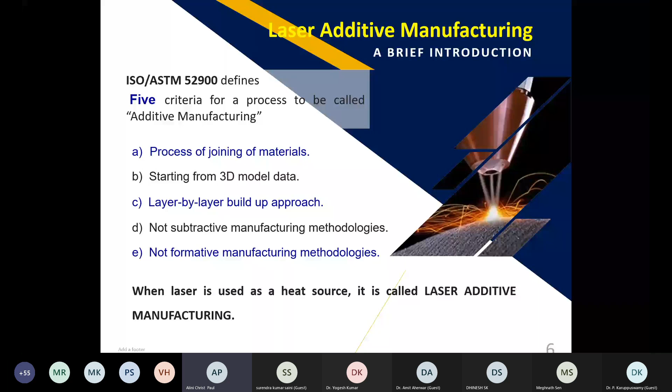I will say additive manufacturing is nature's way of growth. You take a seed, and how does it grow into a plant? It collects all the things from the surroundings and grows. Similarly, an infant becoming an adult is also taking, eating, and doing so many things, and finally becomes an adult. This is a sort of additive manufacturing.

We, as human beings, try to work on and learn this technique from the beginning, and try to make houses. This is a very fantastic example you see here. We use some basic blocks and make the house.

We were not addressing this because we did not have the capability to address it. This was more natural. Therefore, we were going for other methods which were logically simple and easier for human beings to work on, focusing on subtractive and formative manufacturing processes.

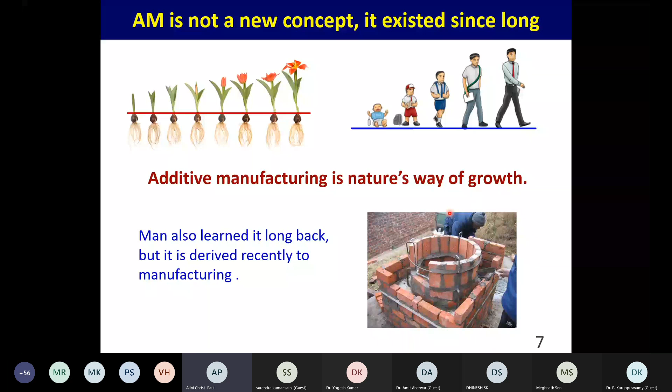Now, if you compare these three technologies, let me highlight some points. In additive manufacturing, surface finish and dimensional accuracy are low to medium, while these things are pretty good in subtractive and formative manufacturing.

Similarly, if you talk of size of components, a bigger component can be machined in subtractive, but in additive we have a limitation of machine size, so there are issues.

But now what makes it different? The difference is that it uses a shapeless material and makes it into a different form. The buy-to-fly ratio, meaning the material you buy versus the material that ends up in the part, is very close to 1, which is very good. And if you talk of geometry, it's made altogether different for manufacturing, and it is changing the whole approach.

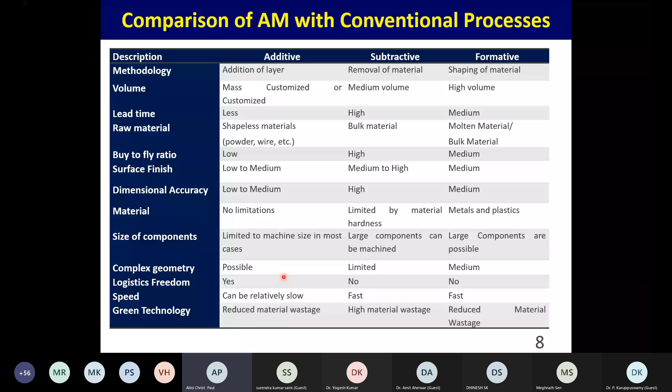So with this small discussion, let's see how it behaves in terms of cost. In additive manufacturing, cost per part doesn't vary a lot. There is a small slope due to things like initial design charges or procurement charges, which may not affect the cost much, but there is still a small slope.

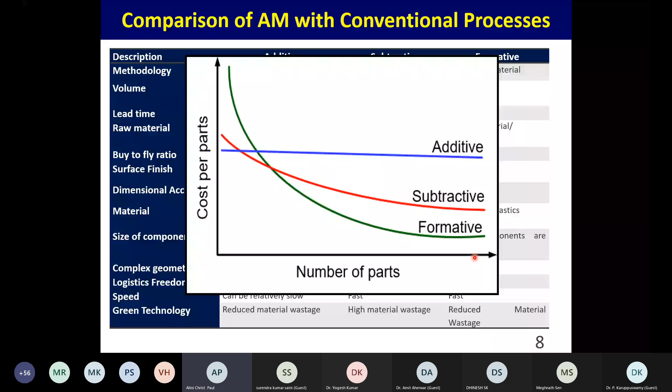But in subtractive and formative manufacturing, as the number of parts increases, the price goes down drastically. So this is the basic difference in terms of price.

Now let me introduce, when we talk of such a big technology, why do we need this, and how should things be done? Let me take an example from a very commercial market. We all love cars as mechanical engineers. Yes, we all know cars. Now let's take the example of the car market.

Today we have cutthroat competition. If you compare some 20 or 25 years back, we had only two companies in India selling cars, Fiat and Ambassador. These companies were targeting a particular segment, and there was no competition. They were selling the way they wanted, so there was not a lot of change.

Now, in pure engineering terms, the cost of a car has two components: one is the cost of manufacturing the product, and second is the cost associated with the development of the product. I'm not talking of profit, economics or other stuff, just the straight engineering aspects. So the car cost has two major parts: manufacturing cost, which includes material and everything, and development cost. Now, what is happening in these years? Though the market has grown up...

...the number of competitors in the market has also increased. Today we have Suzuki, Fiat, Honda, Hyundai, MG, so many players, each coming with more models targeting different segments. So what is happening eventually? Though the size of the market has increased, the effective volume of cars sold per particular model is reduced. Since it is reduced, the development cost is likely to go up.

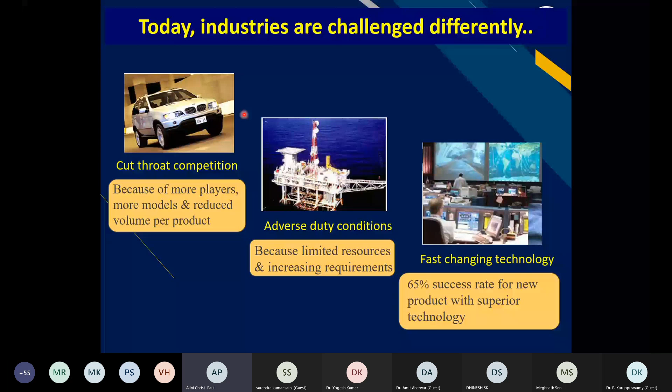Let's understand how things can be achieved. Keep these challenges in mind as we address them in the second part, as we go ahead trying to understand how things are. So let's focus first on the overall methodology of laser additive manufacturing.

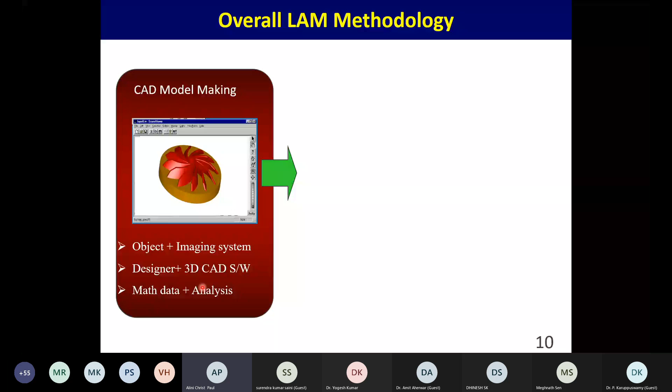In laser additive manufacturing, we start with a model, which can come from an object and imaging system, or be the output of a designer using 3D CAD software, or the output of mathematical data analysis. Once this is done, we slice the model, then do some job manipulation, then layer-by-layer material deposition, and finally the product is converted into the finished part. This is the overall methodology of laser additive manufacturing.

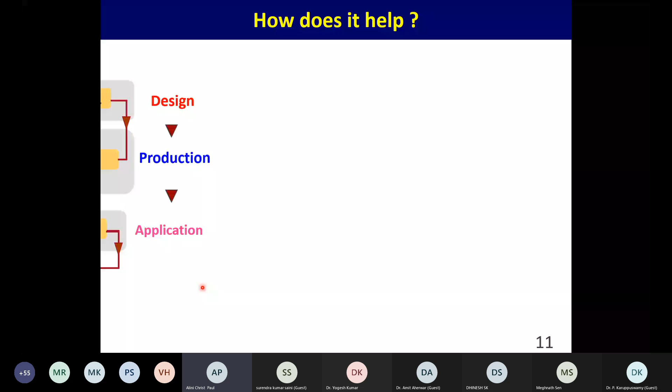Now, we are working on this methodology because there are challenges in the market we have to address. How can we use laser additive manufacturing to change the economics? How can we take advantage so that we become attractive in this space?

I'm presenting you a conventional manufacturing cycle. Let's see how it works: we go for synthesis of the design, do the analysis, prepare documentation and drawings, then plan how to proceed. Once the design is finalized, we procure raw material, procure tools, do programming and manufacturing, then quality control, and finally packing and usage. This is a typical cycle of how conventional manufacturing works across the levels of design, production and application.

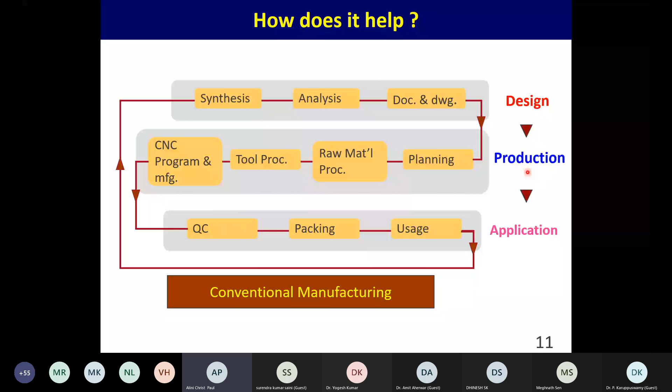Now, if you take additive manufacturing, laser additive manufacturing, you see there are so many things which are redundant and removed from the development cycle.

See what is happening? We are working with a 3D model, so we need not go for separate preparation of drawing and documentation. The model itself has all the information. We need not worry so much.

Second part is we are using laser additive manufacturing. We, as a machine, are planning the whole stuff into it, so we need not worry a lot about the planning aspect. In conventional process, we think whether this job has to go for lathe, or milling machine, or should we send it to the fabrication shop for welding. All this planning, if the design is ready, you can just proceed ahead.

But in case of conventional manufacturing, unless the design is freeze, you cannot go for procurement of raw material. Obviously the reason is, if you think the size of the final component comes as a design of 200 by 200 by 200 millimeters, and because of some reason 1 millimeter goes up, you are gone.

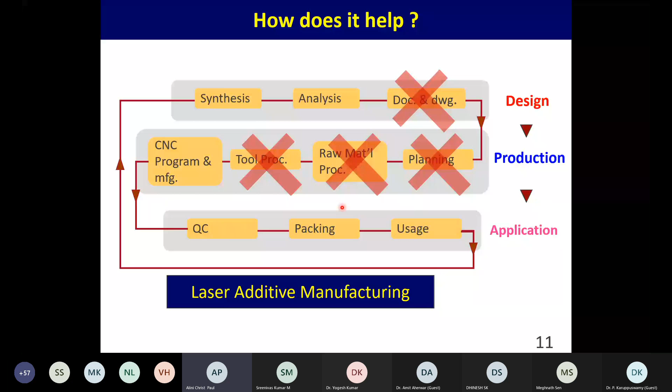So that is the thing which is changing the whole scenario. So what I'm planning is, now let's try to summarize whatever advantages I talked about and discuss these points. What are these advantages? One advantage we talk of when we talk of laser additive manufacturing, the very basic concept of additive manufacturing, we always call complexity for free.

See what is happening, if you take a very complex shape and slice it into 2D, every 2D slice becomes a very simple structure. For example, if you make a cone and slice it, it is simple - circles one over another with reducing diameter. So that is very simple. If you extrapolate this to a very complex product and slice it, you will find the complexity is for free.

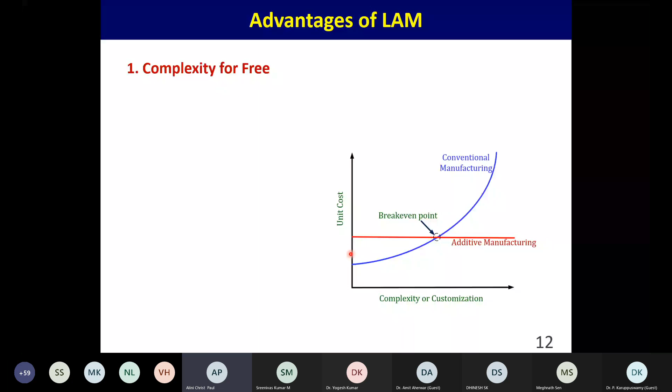The second aspect is the simplification of part fixturing. If you talk about conventional machining or manufacturing, you need very tight part fixturing because there are a lot of cutting forces and so many things coming on it, so you have to have something different. But in case of laser additive manufacturing, we are using non-contact tools, so things are simple and better.

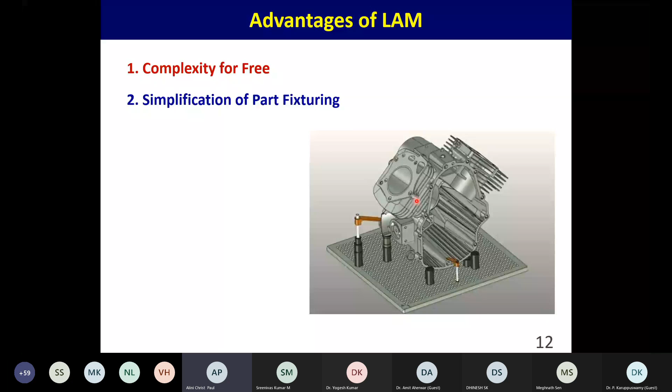Mass customization is possible. If you see in the last 1 century or maybe 1.5 century, the whole engineering started from customized products. Earlier we had fitters who were fitting the job as per requirement, and that's how the first or second cars were made. Slowly they started moving toward standardization of the product. They came with different standards, metric standards and ISO standards for components, and even different nuts and screws were tried out and standardized. So what happened, from customized we moved to a mass production level by standardization.

Now we are going one step ahead. We are taking 'mass' from mass production and 'customization' from customized product. So we are matching these two, and now we are going for mass customization, because the customer wants everything differently for himself, and it's possible to accommodate these aspects in laser additive manufacturing.

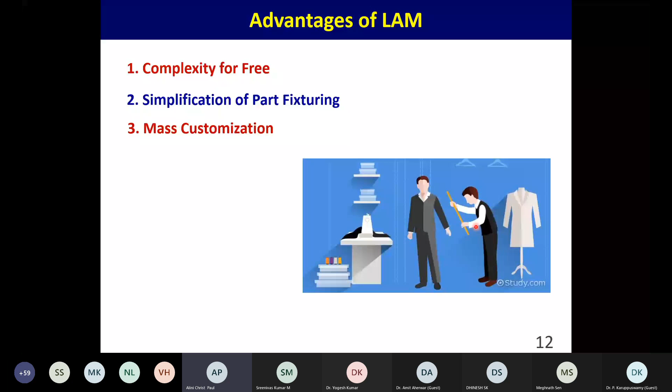Another aspect, very important and good, is that we can think of making integrated components. You have a component, and you want a sensor inside the material. It is possible to embed it, which is not possible by conventional process. This makes the thing very much different.

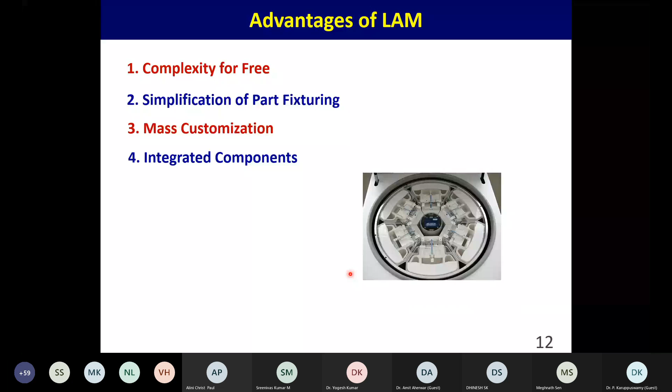Now let's talk of material design freedom. Here, what we can do is focus all our studies onto feature-based design and manufacturing. What I want to say is you are focusing on the feature rather than the material, and therefore it is providing you material design freedom.

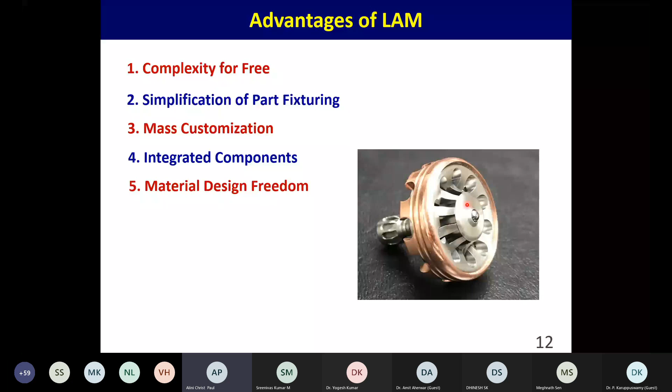Another aspect is it provides you logistic freedom. What is logistic freedom? We have a model, we have a component. We can send these models and electronic data across the globe, consult people, and collaborate with different people across the globe to come up with a design. That sort of availability is there, which was not possible earlier.

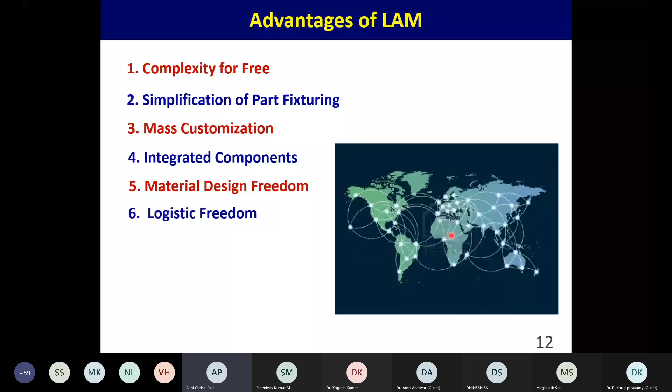In case of laser-aided manufacturing, we are using metal or wire into shapeless form, and we are depositing the material as per requirement, which leads to reduced wastage. Reduced wastage means the technology becomes a very much green technology.

So if we talk of the advantages of laser-aided manufacturing, these are the 7 prominent advantages this process has, making the thing altogether different.

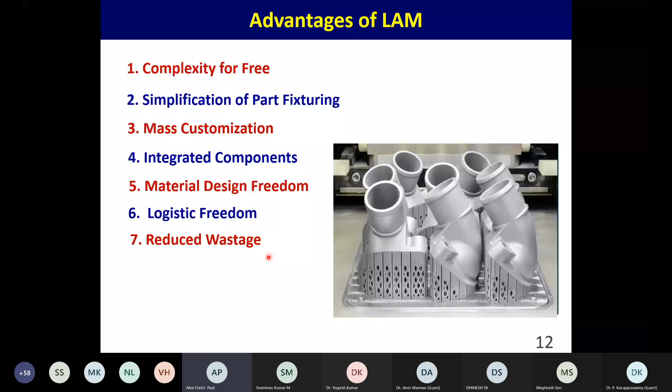Now, if we talk of the classification of the process, laser-aided manufacturing can be classified into 2 different processes: one is called powder bed fusion, another is called directed energy deposition. In the classification of additive manufacturing, all processes can be classified into 7 classes, and among these, these are the 2 classes.

Now, if you talk of powder bed fusion, there are 2 processes: one is called laser sintering, and the other is called laser melting. In laser sintering, what is happening?

In powder bed fusion, what we do is simply spread a thin layer of powder. After that, we use a laser to scan and melt it. If melting is 100% of the powder material, then it is melting. If it is only surface melting and the particles are joined together, then it is laser sintering. This is the basic difference.

Now let's go to another class called directed energy deposition. In this process, you can use either wire or powder as raw material. When powder is used as the material, it is called powder feeding, and when wire is used as the input material, it is called wire feeding material.

To further explain directed energy deposition, what we are doing is directing energy to a point, and then depositing material to give the shape. This is the logic behind how the nomenclature has come.

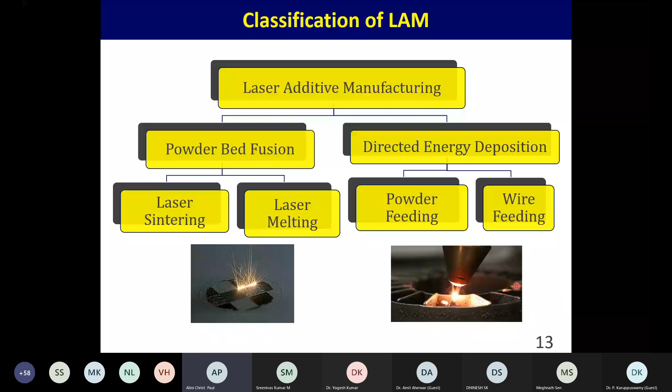So with this, we go to the next slide. You will enjoy these scenes and scenarios. This particular slide presents what we have developed at RRCAT.

At RRCAT, we have developed a directed energy deposition machine as well as powder bed fusion machines. Both machines are working satisfactorily and very nicely. When I show you clips of these machines, you'll see in the directed energy deposition machine, powder coming and spreading as material deposition takes place, and in powder bed fusion, it's spreading the powder and then processing it.

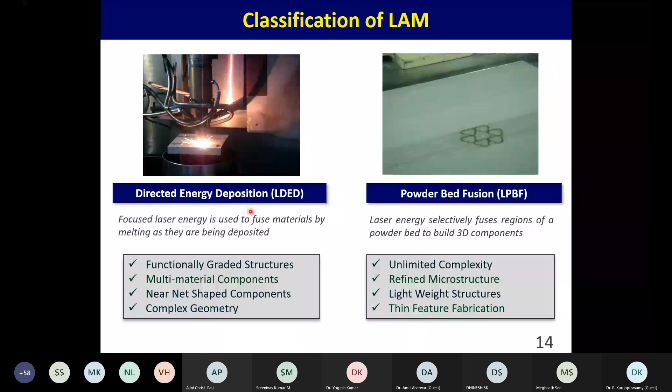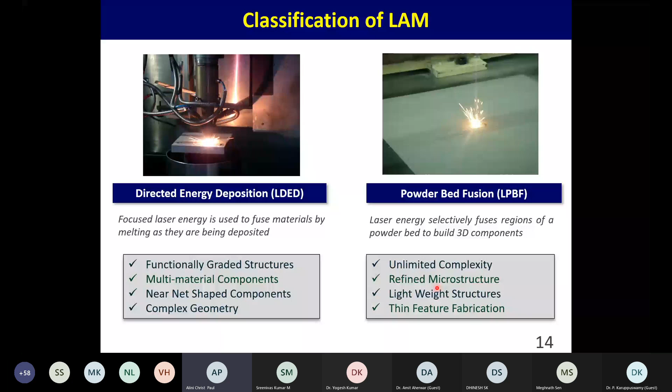If you compare the advantages and disadvantages of these processes, you'll find directed energy deposition is very good for functionally graded structures, multi-material components, near net shaping components, and complex geometries. On the other hand, powder bed fusion systems score points for unlimited complexities compared to directed energy deposition. Its deposition speeds are very fast, resulting in a fine microstructure, and it's a very good process for making lightweight structures. For thin features in a fabricated geometry, laser manufacturing definitely scores a lot.

Now let's go to another aspect of it. When we talk of this technology, there is always a question: what will be the global status of this technology?

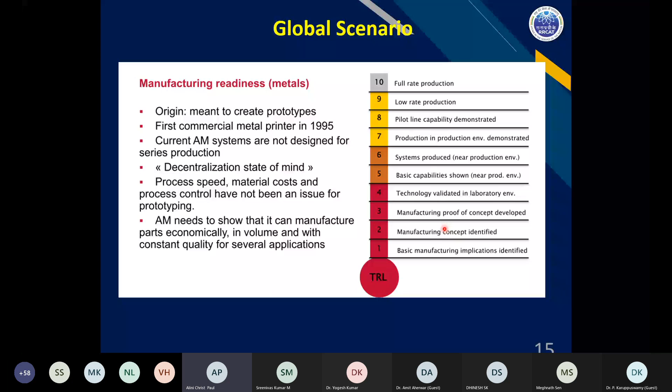So what is happening when you see talk of the global scenario? Today we always talk in terms of technology readiness level. If you see what is the scenario for metal additive manufacturing globally, on the TRL scale of 1 to 10, you'll find this status: in case of aviation and automobile, we are at TRL 5 and 6. In case of tooling, space and drones, we are at 7, 8. And in case of dental, medical instrumentation and other stuff, we are at number 10. So this is our today's scenario.

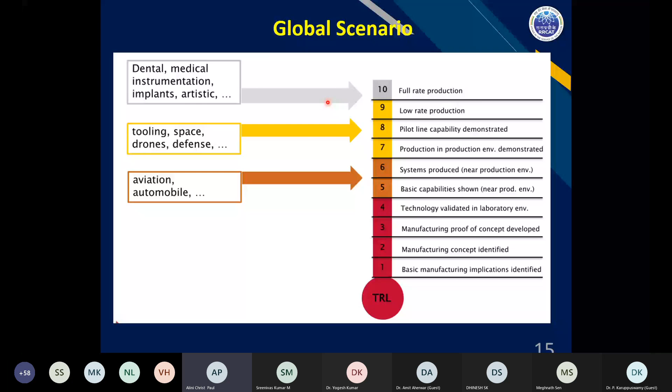And if you talk about what is happening in the Indian scenario, who is doing what, you'll find that most of the industries are working and focusing on plastic AM machines. And now some leading institutions are doing R&D for laser additive manufacturing. So this is the scenario.

And who are having metal additive manufacturing machines in India? So RRCAT, CMTI Bangalore, ARCI Hyderabad, DMRL Hyderabad, GTRE Bangalore, IIT Kharagpur, IIT Bombay, IIT Kanpur, IIT Palakkad, CGCRI Kolkata, IGTR - these are the people who are having metal additive manufacturing machines. There are some private players also, for example, Wipro, Honeywell, 3D Incredible, Dentcare, GE, Objectify. So they also are having a metal additive manufacturing machine.

So about who is developing LAM machines in the country: we have RRCAT, we have developed both the machines, directed energy deposition as well as a powder bed fusion machine. CMTI is working on development of powder bed fusion. CMERI has developed the DED machines. IIT Bombay, IIT Kharagpur, PSG Coimbatore, and Intech - so these people are the players leading the development of laser additive manufacturing in the country.

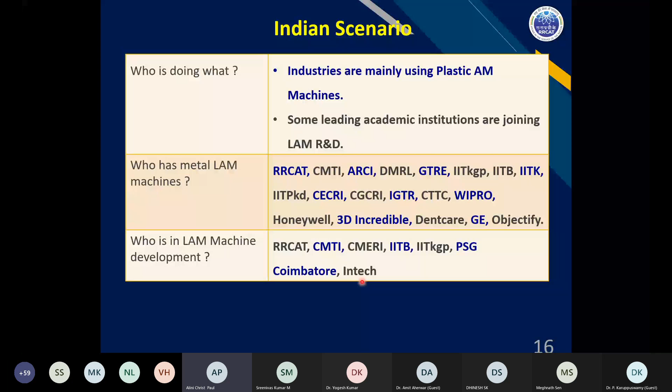Now, when we talk of the global scenario, so we started from the globe, we came to India. Now let's come down to LAM at RRCAT. I already told what are we doing at ALAM. So let's say a quick brief about what ALAM is doing, what are we doing in laser additive manufacturing.

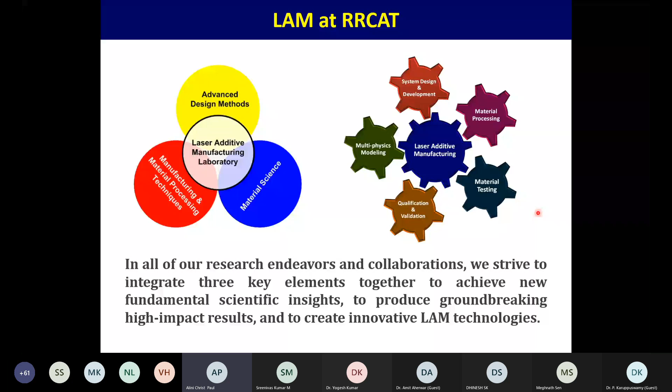In laser additive manufacturing, we are starting from the system design and development. We go for the material processing. We are doing the material testing. We are also doing the qualification and validation, and we are working on multi-physics modeling aspects. So this is the whole regime that we are working on. And if you see how things are being done, these things are working at the junction of advanced design methods, manufacturing and material processing techniques, and material science. So if the input from all these three are coming, we are working on all these five domains. This is today, and we are working on different aspects so that things can be brought to a different level.

What I want to emphasize here: if you buy this machine from a foreign source, it would cost in the range of maybe 5 to 7 crores. Now, if you develop this machine, whatever we built here at RRCAT, we hardly spend 2.1 to say 2.5 crores. So what I'm saying is, the cost of the machine that is built and imported by other people - if we start developing these machines in the country, we'll probably be able to provide them at a very low cost, maybe 3 times less than what we are importing today.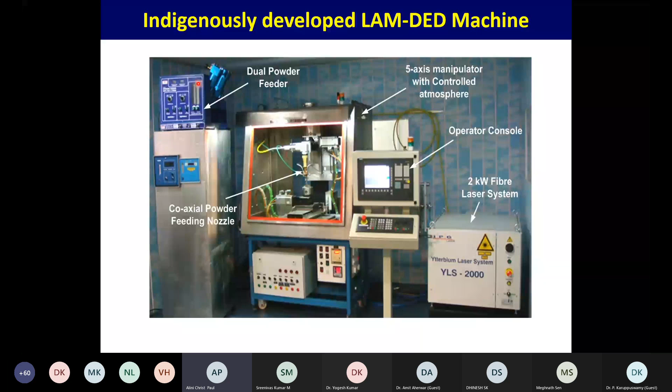810D controller with a working volume of 250 by 250 by 250 millimeter cube. This machine has a glove box in which purity of 20 ppm oxygen and 30 ppm moisture can be achieved without any problem.

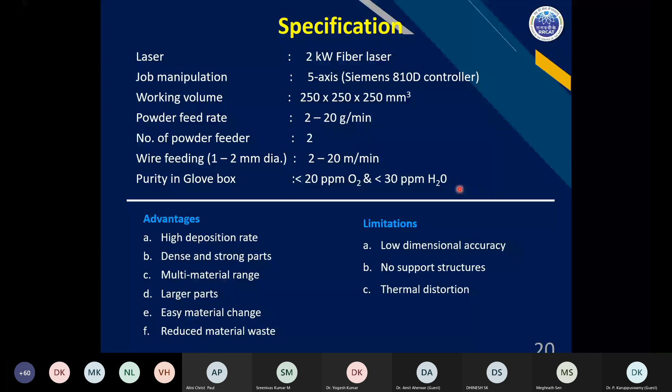This is another machine we have at RRCAT. It's basically based on powder bed fusion methodology, having a 500 watt fiber laser. It's scratch-built entirely, and even the GUI is developed by us. This machine is working fantastically, and again it works for the similar volume.

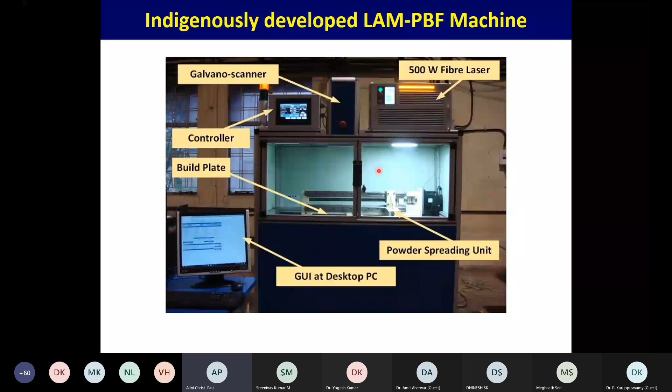If you talk about the cost of this machine compared to imported machines, those would cost you 3 to 5 crore. The machine we developed, we spent hardly 70 to 90 lakhs. So this is the price regime - the price can come down to 3 to 5 times when these machines are developed indigenously.

So we are further working on a model, trying to bring things together so that we can provide a really good solution to industries, specifically to academic institutes who want to join this. We are working on the design of this aspect, and it would be really nice if we can have some machine at a very attractive price with all the features required for an education institute to move on.

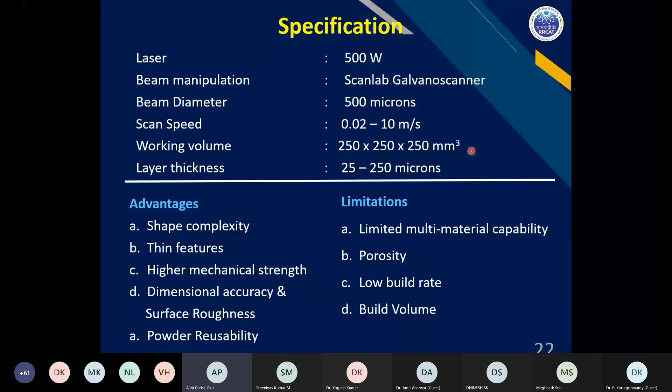This is a quick comparison of directed energy deposition as well as powder bed fusion process. You see the feedstock used in case of DED is in the form of powder and wire. Here, in powder bed fusion, it is only powder.

What I want to highlight in this table is directed energy deposition is very good for multi-material deposition. Powder bed fusion is difficult - now machines are coming up, different methodologies are being tried, but still it is difficult. If you talk of repair, DED scores very good in this regard compared to powder bed fusion. It can be done, but again there are issues. If you talk of laser power, it is always more than 1 kilowatt in case of DED, and 200 watt to 1 kilowatt for powder bed fusion systems.

If you talk of surface finish, these are the numbers, and these are the qualities. If you talk about complexities, these are the status. So this presents a quick comparison of both machines, the technology being used not just at RRCAT but also across the globe.

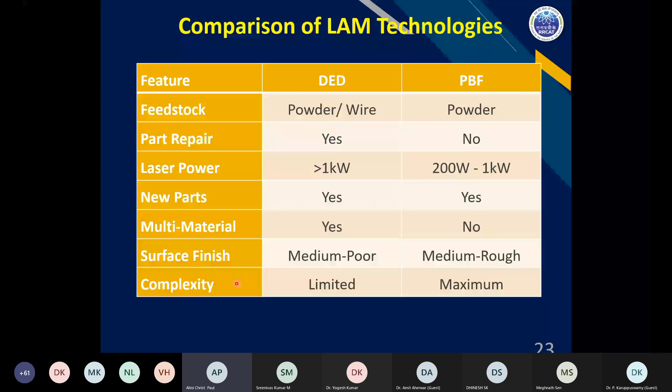Now I'll be talking to you about the processes we have developed, the different things we tried, and how things are being considered. If you talk of the process part of it, in laser manufacturing, the whole process can be classified into 4 basic parameters: laser related, scan related, powder related - we will be taking up all other parts subsequently. I'm not doing too much here.

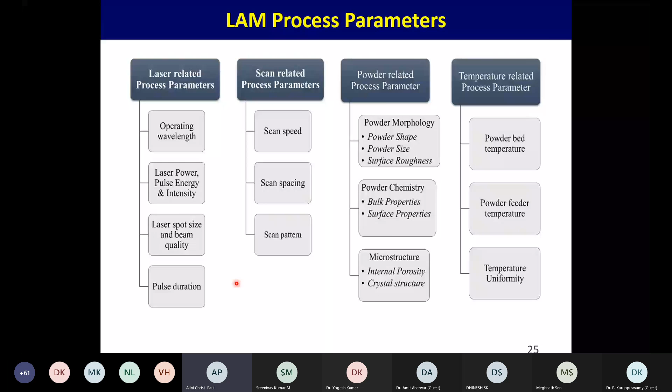See what happens if you talk of the laser, and another parameter which is very important is the scan speed. Now these are the 2 parameters we are talking of - laser power and scan speed.

Now what happens is, if your laser power is very high and scan speed is very small, it results in keyholing, where material is too much melted and a cavity is formed, which is not required, because you should put the energy really required to join the material, not a lot of energy. On the other hand, if laser power is very less or scan speed is very high, you are hardly able to join the material properly, so there would be a lack of fusion and porosity available. So this is another scenario.

In general, you have to optimize these 2 parameters. When you start optimizing, you see a called balling effect - some ball formation like this, then you can go like this, or further, if you go, you can have a very regular and continuous track formed at that particular parameter. What I want to highlight here is these parameters are different for different materials, and one has to really focus smartly on this and identify a real window to work on these areas.

Another important aspect is, though it looks like this balling effect is very bad, these are highly reproducible, and this can be exploited to make porous structures. We'll come to subsequent slides where we'll discuss this further, but what you have to keep in mind is that this particular balling effect can be used to make porous structures.

Now another aspect is, if you make a track - just take a powder and make a line, whether in powder bed fusion or directed energy deposition, and cut a section of it - that track has got W as the width and H as the height. Now, if you talk of these parameters, this is a very crucial parameter for anything to happen.

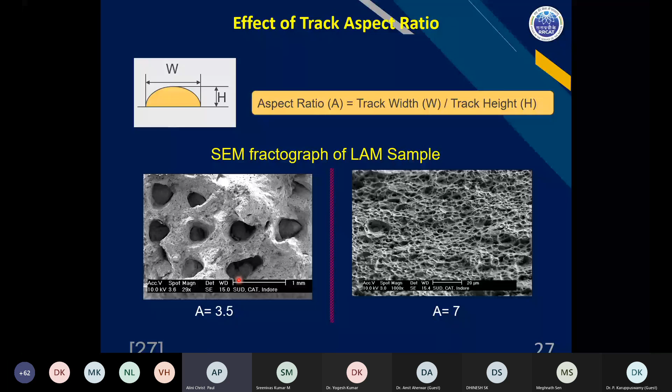What I said is though people say porous structures are difficult, there are ways you can have a very good and controlled porosity using the balling effect or using other methods. These are the things which are considered and made differently, and one has to account for them.

Another important aspect I would like to discuss is scan pattern. When you deposit, say, a rectangle, you can fill this rectangle block in different ways, like when we were young we used to fill a rectangle differently when coloring or painting. But here we are dealing with metals.

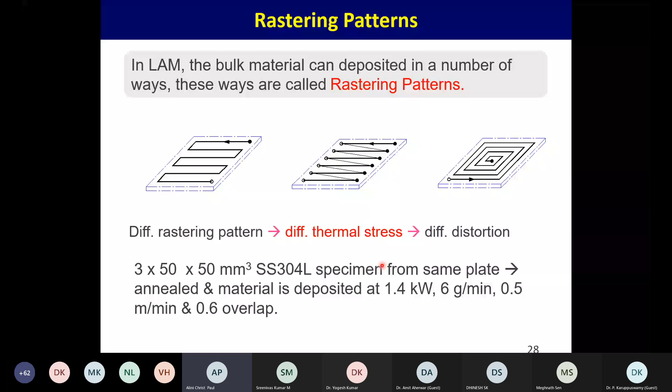When dealing with metals, every different rastering or scanning pattern leads to different thermal stresses and different thermal distortion. So I'm going to present a very nice case in subsequent slides, and you will love to see it. On the first slide, in the left top corner, we are presenting the S pattern.

In the S pattern, what is happening? You are starting from here, offsetting it, then coming down like this. You are making and filling the whole area.

In another one, you are making a Z pattern. In the Z pattern, what are you doing? You are starting here, going up to here with the laser, stopping the laser, coming back to the next point, starting and doing it. That sort of thing we are doing with the Z pattern.

The third one is, you can also think of filling the same area with a spiral in or spiral out. So we are comparing these four rastering patterns to give you a very good brief about how the rastering pattern and scanning patterns change the scenario.

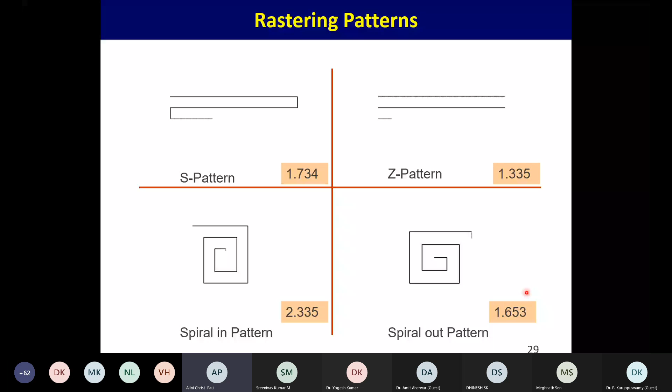See, this is the case. In the S pattern, you are seeing there is a distortion. There is a distortion, right? In the Z pattern, again you are seeing the distortion, and the distortion is in the direction we are scanning. Here also we are scanning in a direction, and the distortion follows that direction.

When we talk of spiral in, the distortion is always altogether different. If we talk of spiral out, this is the case. So what I want to say is, though it looks obvious and seems like things can be resolved very nicely without any problem, that doesn't happen. Every rastering pattern brings a different distortion to the product, and one has to consider this as a parameter.

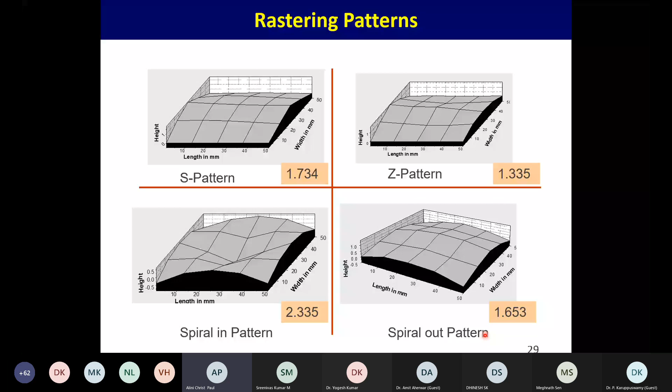I'm saying the Z pattern gives the least distortion in our case because of the similar heating and cooling pattern during the whole process. Another way people try to work on to reduce this sort of distortion is to fill the area with a meander approach.

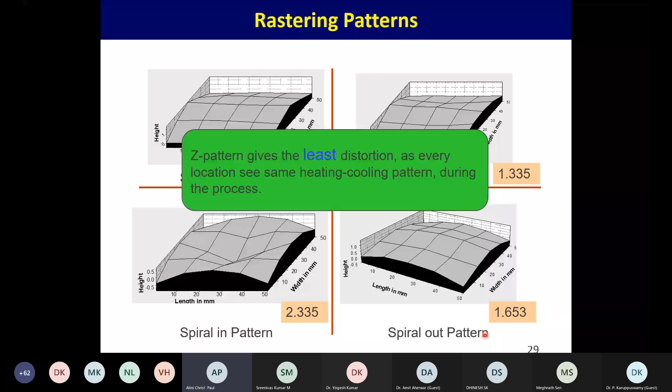What you are doing is depositing here in this direction. After that, you rotate the whole geometry by 67 degrees and deposit like this. So for every layer, you rotate your rastering pattern by 67 degrees, which is called the meander approach, and this is very nice and somehow balances the effect of distortion and deformation.

Another way is having a stripe deposition. You can have, on a large surface, just go on depositing like this. Particular stripe width is important because if you have a very large surface, for example a plate of 300 millimeters by 300 millimeters, by the time you go to that end and come back, the heating effect will not be there. So it's better to make small stripes and then go on doing it. That sort of thing people are trying.

People are also trying chessboard patterns. You can have a small square made and then rotated by 67 degrees. So that sort of thing people are trying. All these efforts are to reduce the effect of scanning strategies or rastering strategies on the components.

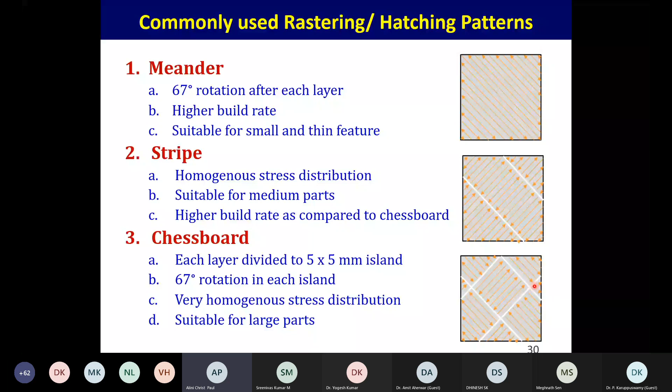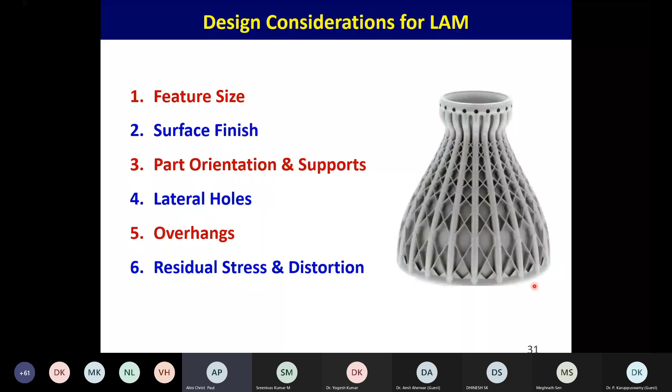Another point I'm going to discuss with you is the design consideration of laser additive manufacturing, what we have learned over these years. This includes feature size, surface finish, part orientation and supports, lateral holes, overhangs, and residual stresses and distortion. So you have to have some considerations for deposition. For example, one of the prominent parts we talk of is the feature size.

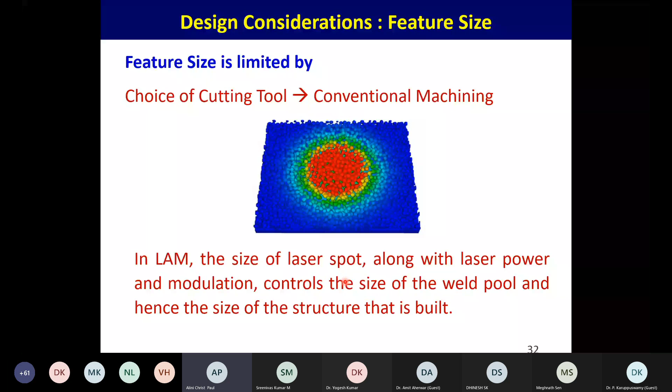In feature size, generally, beam diameter acts as the diameter of a cutting tool in conventional manufacturing. Like you cannot have a hole smaller than the diameter of the drill, similarly you cannot have a feature size smaller than the size of the laser beam spot. This is an important point we should take away from here.

Besides this, there is the matter of surface finish, which can be controlled by modulating the laser power, by changing the grain size of the powder, by changing the layer thickness. These are the areas, and typical surface finish that people get is in the range of 5 to 10 micron RA.

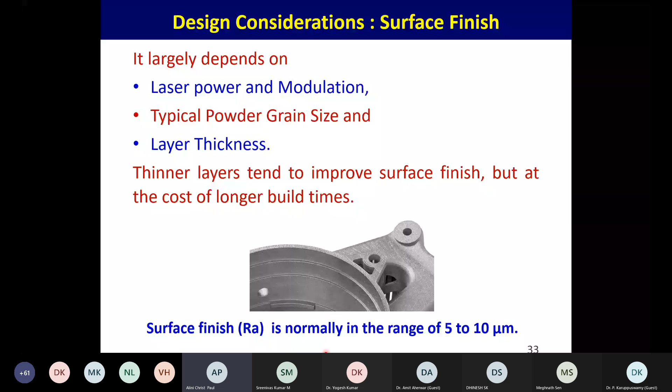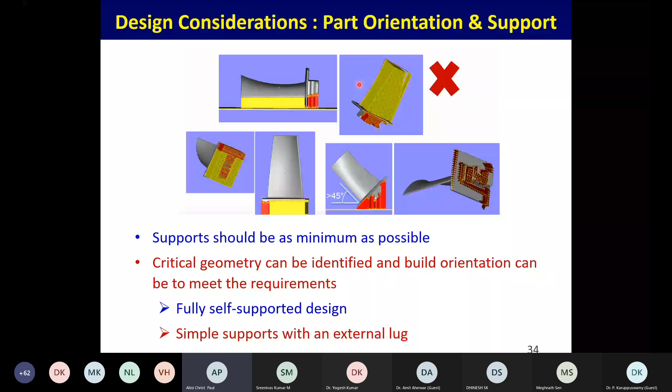Now, if you want to make a component, you can try a different orientation. Whenever we are doing such things, what we have to consider is we should try to reduce the support structure that we are providing, because whenever you provide support structures, you have to spend time and money to remove them, and the surface quality also gets distorted. So you have to really understand and consider these parts when we talk of part orientation and supports.

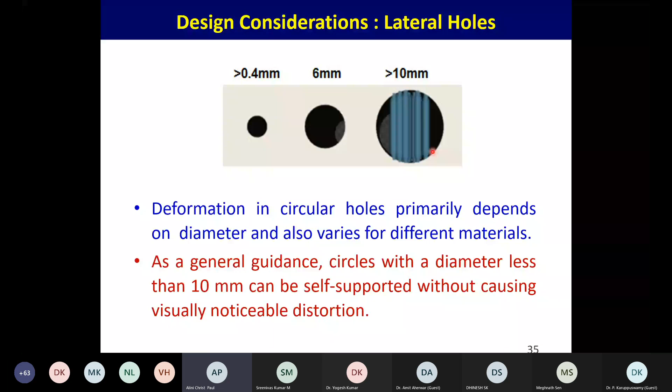Similarly, if you want to make lateral structures, the diameter of the hole can be 0.4 millimeter, 6 millimeter, or 10 millimeter. Whenever you are crossing the diameter of 10 millimeter, you need to have some supporting structures, otherwise it will not stand there in case of metal. Now, how to remove these support structures during the finishing operation is again an issue, so we have to spend time designing this.

Another aspect is the overhang structures. When you make a track on a solid block, you have very good heat flow. But when you have structures, either you will not have material, as in case of DED, or you have powder material sitting there, as in powder bed fusion. In both cases, the heat flow will be much lower than what we have on a solid block. So in this case, the thumb rule is you should try to avoid any angle more than 45 degrees, and 30 degrees is very good.

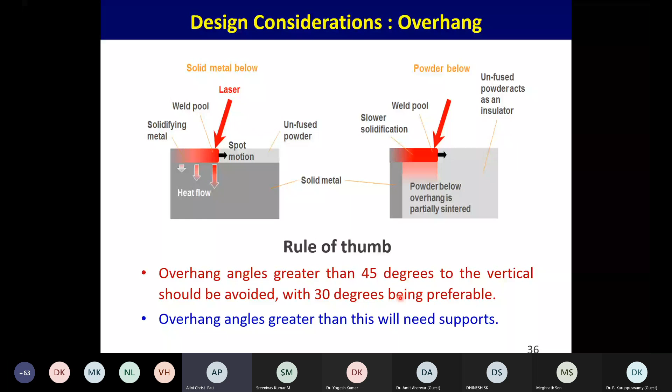And whenever you have a geometry in which these things are not easy to remove or very difficult to reach, what we do is we need to come up with some support structure to make things in a different way. Another aspect is we are melting and depositing material in different forms and aspects.

Whenever the material is melted, it expands naturally. The moment it becomes liquid state, the old stresses go back, and then after that the contraction starts. This leads to residual stresses in the material, and different hatching patterns result in different residual stresses. What we have to understand is, if at any point local residual stress is more than the ultimate tensile strength of the material, it is likely to have cracks. So we have to take care while considering the design.

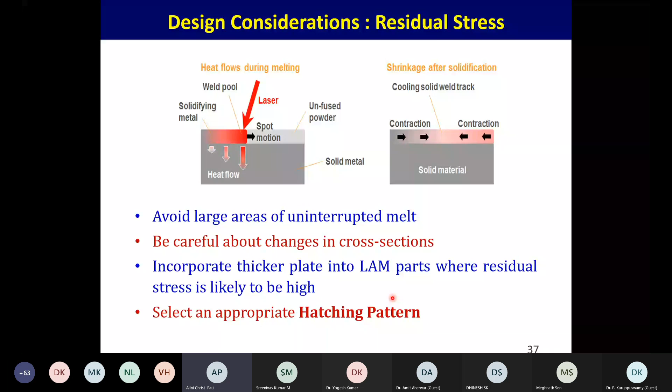And now I'm going to present the recent work that we have done at our CAT, and we'll showcase how it is changing the whole scenario.

So many institutes are working with us, and we are trying to give this, considering the understanding that it is not possible to have a dent impact in metal additive manufacturing technologies alone.

So we are collaborating on this. And about the non-disclosure part, we will not be sharing whatever ideas you have. Then we'll see how other institutes who are working with us compare, where your proposal stands, or whether we don't want redundancy in the work. Normally, if there's no redundancy, we accept it as it is. And if there is redundancy, I may suggest what changes you should make in your project, so that it can be taken up by RRCAT and we can extend the first support in terms of the processing.

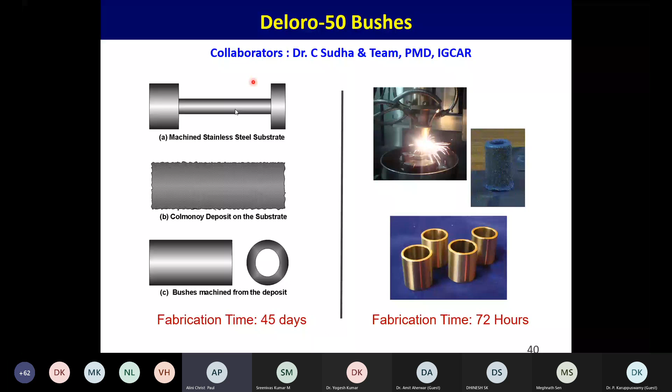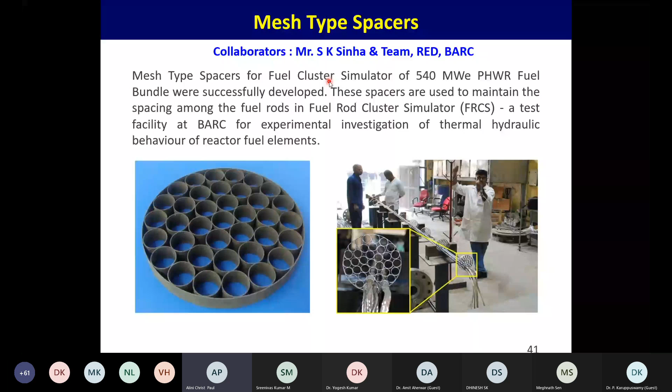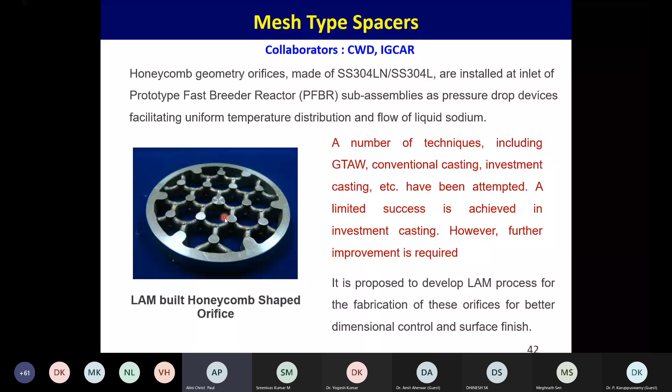Another nice example is making compact heat exchangers. These are particularly being used for advanced Generation 4 nuclear reactors and solar thermal energy generation. What is the beauty of these heat exchangers? They have very small channels - the size of the channel is about 2 millimeters wide and say 3.5 millimeters high. It's such a small channel.

And these channels need not be straight - you can have any wavy shape to increase the heat transfer. So what we do is deposit it layer by layer, and these components are for the future, and will be used in supercritical CO2 Brayton cycle thermal generation. What I want to say is these heat exchangers are conventionally made by a different process.

They do it by diffusion bonding. So what they do is acid etching to make the channels, and after that they stack all the plates and take it for diffusion bonding in the furnace. That is the way it's done.

The cost of these heat exchangers by conventional process is in terms of 70 to 80 lakh rupees. And we built this with our company spending maybe 7 to 8 lakhs, and that is what we are talking about by deploying this. Now these modules are ready and we are going for the next level of testing.

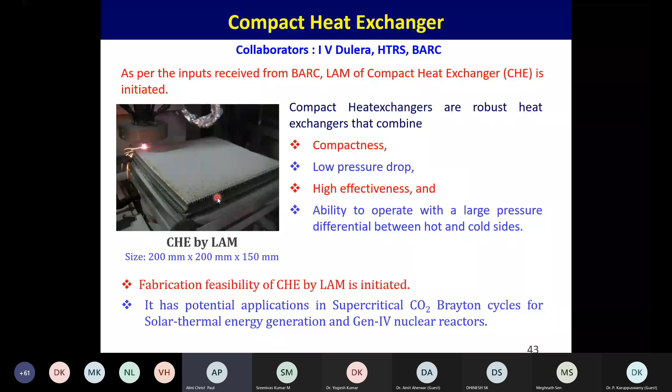Another fundamental and very nice study we did is depositing a silicon carbide layer on a thin zircaloy tube. The tube thickness is 0.6 millimeter, and we had to deposit a 0.2 millimeter silicon carbide layer. We tried and successfully did it, and this work is very important because we are developing this to address post-Fukushima challenges in reactor technology, specifically high temperature oxidation and hydrogenation. So these are the things we are trying and have built.

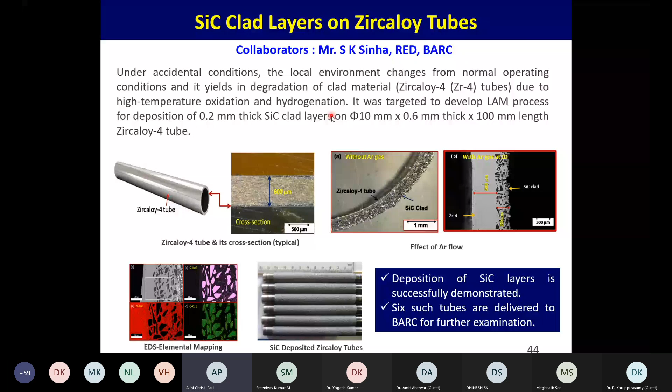We are also doing some basic research, trying to develop deposited copper, trying to understand how things are there. What we found is copper is very interesting because we got a very cohesive, uniform cellular microstructure, which is otherwise not possible. This has already been published in one of our works.

Another thing we tried is building composites of stainless steel and tungsten carbide. We did this with NIT Warangal. This is also pretty good work on how the hardness of stainless steel can be further increased without compromising on the material's other properties. That's what we did.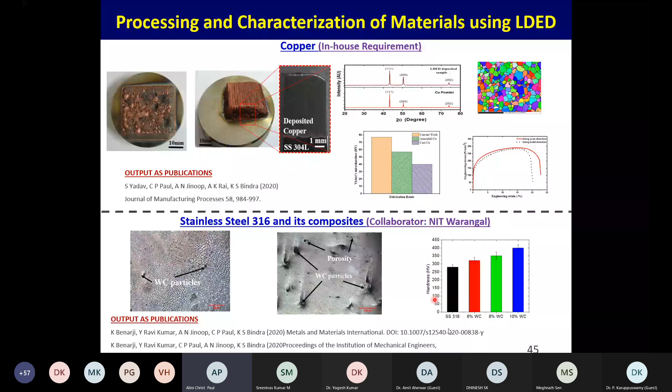Another application we built was for the Institute of Plasma Research with IIT Kanpur. In this work, we had to deposit copper, and deposit molybdenum on copper. This work is going to be part of the ITER project, International Thermonuclear Experimental Reactor, being built in France. What they want is for this copper to extract a lot of heat, and molybdenum is required because it will face the plasma as the first layer. So that's the sort of thing we tried and developed the process for.

Now we are going for making the component at the second level.

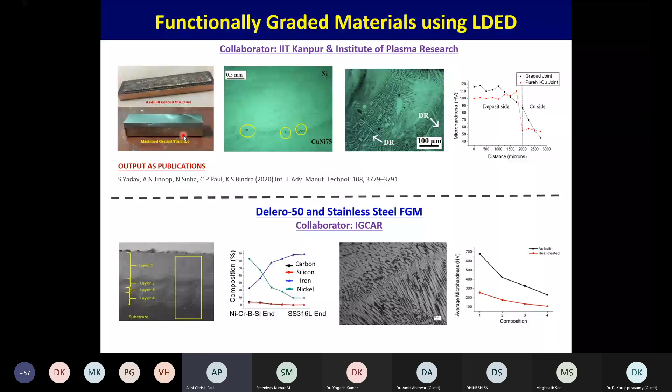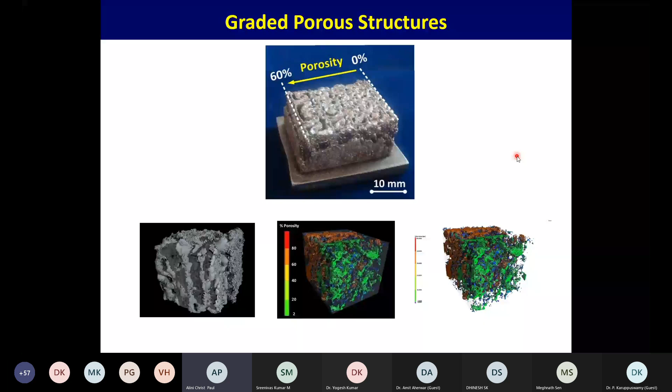I was talking to you about porosity and porous structures and different aspects of it. Can you think of making a porous structure which is 0% porous here and 60% porous there? This is possible because in additive manufacturing and laser additive manufacturing, we are using a laser pencil, writing 3D shapes. So it is possible. Many times we have been taught that porosity is very bad in material, but that's not true. The reality is uncontrolled porosity is bad. If porosity is under control, and you know how to use it, it can be a beautiful thing to apply. So graded porous structures, porosity at defined locations, porosity at desired sizes, achieving different effects - this is possible and it can be done.

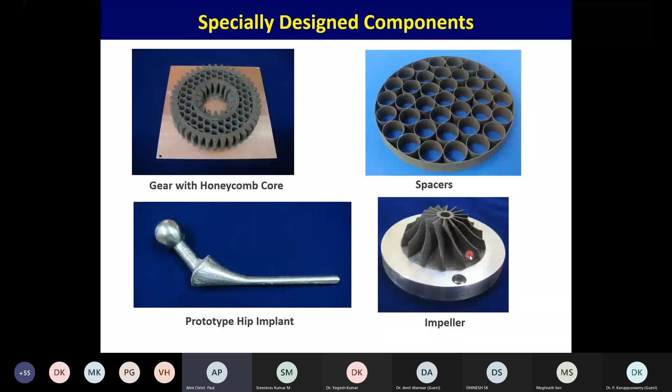I'm also presenting many specialized components built by us. For example, here with a honeycomb core, this was built in 4.5 hours - diameter 100 millimeter, thickness 25 millimeter. You already saw the spacer. We also made one prototype hip implant and an impeller. All these things are built by us using our Indian machines built at RRCAT, using raw material procured from indigenous sources and from the open market. So that is the sort of technology we have built and developed at RRCAT.

After this, I'll be talking to you about the technological challenges we have as India, or as a community of laser additive manufacturing people.

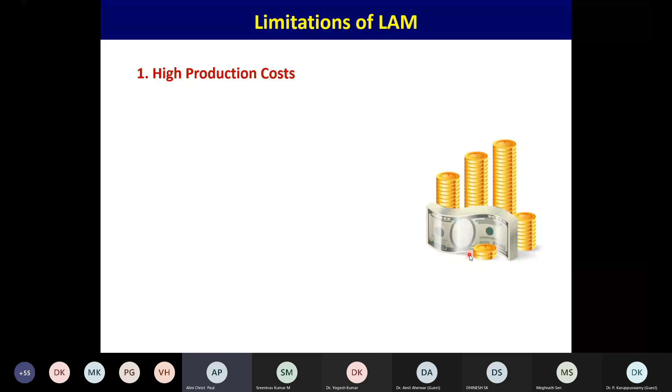We have to understand that laser additive manufacturing has a lot of issues in terms of cost, because the input cost is very high, the primary investment is very high, and it requires a lot of money. So the production cost is very high in case of laser manufacturing, and it is limiting its field of use. But what I see is that in time to come, there will be more manufacturers, more machines available with better technology. The development cost and patent-related costs will also be removed. Once patents expire and these things happen, the cost will definitely come down, leading to lower production cost.

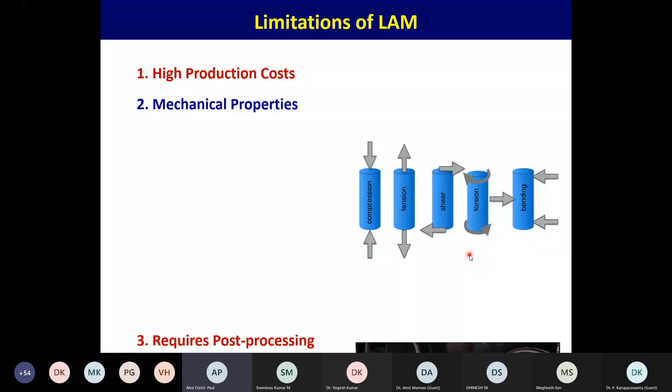Today, there is a challenge to process materials, because of the distortion and directional deposition of the microstructures, we have a lot of issues in terms of compression, tension, and shear. So every time we have to identify and systematically define the way so that better things can be tried out. To resolve the issues created during the process, we have to go for post-processing. People are trying to develop different methodologies for it, but again, this is a limitation. We have to see it and work on it.

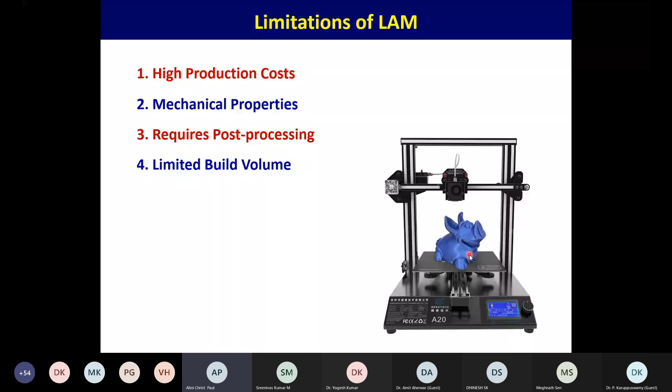Today you cannot build beyond the limitation posed by the machines. Both of our machines are 250 by 250 by 250. We have larger volume machines which will be available soon, with the stair-stepping effect. So these are the limitations that we have today as far as laser manufacturing is concerned.

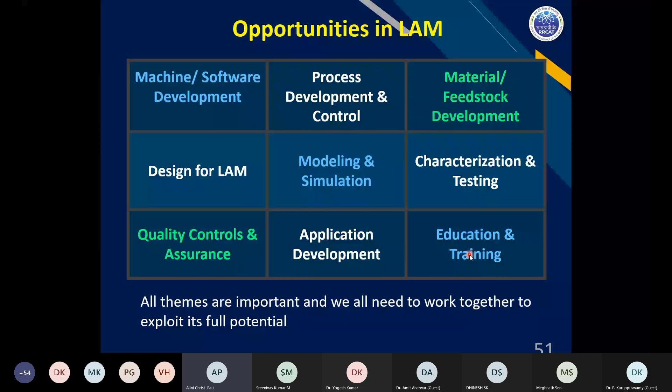Let's talk about the first domain, machine and software development. We know that there is a huge capital investment and limited resources. We need to come up with innovations so that these costs can be brought down and it becomes available for a common man to work with nicely.

On the other hand, if we talk of process development and control, people are trying to do a lot of things in this area, focusing on specific applications, especially in aerospace and space applications. But there are still issues with reproducibility. So what we have to do is come up with a very rugged process development and control aspect, so that we can contribute to laser manufacturing in another way.

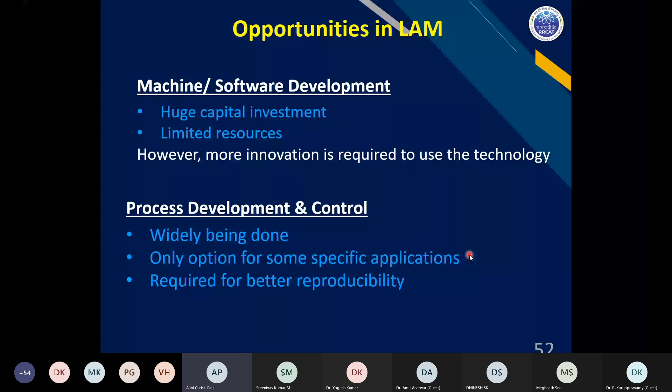Presently, a lot of material developed for other applications, for example plasma deposition or oxyfuel deposition, is being used here as feedstock material for laser manufacturing. Now the issue is all these materials are developed for those processes keeping some specific applications in mind. As people working in this process, we can always think of tweaking the composition so that we can ensure the performance of the material the way we want. So that sort of thing is possible, and there is opportunity for us to work on.

We can also think of bringing in new alloys for AM pertaining to specific applications, so we can give a lot of thrust and push into different areas. There is opportunity for us to draw different thumb rules and design rules, so that this whole technology, which today I'll say is an art, becomes more science and technology. Today we think about how things have to be done.

Something similar exists if we talk of the finite element method - it's very simple and easy to start, but finally, FEM is also an art - how to reduce resources, how to work on different aspects. Something similar is the case with LAM today. We have to move ahead, define the methodology, come up with rules, so that LAM becomes a viable and very good process. And in this whole scenario, we have to unlearn the process we have undergone.

We wish for subtractive and formative process applications. We have to unlearn all these aspects, and then come up with a different format of developing the process, so that we get rid of this replacing approach. LAM is not a very good solution if you simply say conventionally this is made, let's try to do this. No, you have to pour a lot of design thinking into it, come up with a better solution.

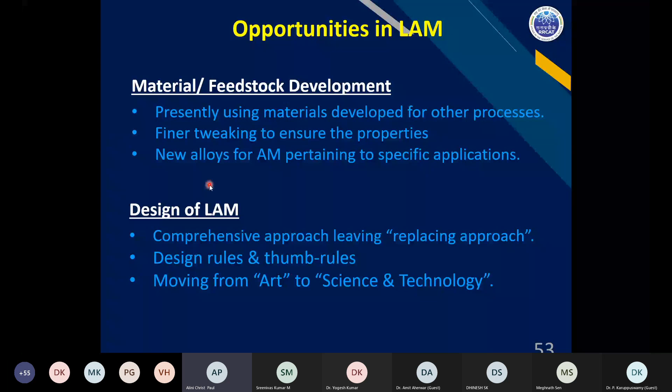You have to reduce the number of parts, you also have to reduce the size. And because here the complexity that is challenged in conventional processes becomes simple here. So many things need to be worked on, coming up with design through the rules. We have to work on the modeling and simulation aspect. We all know that analytic models are very good and fast, but not suitable for complex structures. On the other hand, numerical solutions take a lot of time.

So we have to come up with nomograms and machine learning processes and different aspects, or maybe a hybrid of analytic and numerical models, so that we can give a better solution in terms of modeling and simulation, which will provide very good testing of them.

We also have to work on characterization testing. More sophisticated tools have to be deployed, like micro-CT machines, and simulated load testing setups have to be thought of to come up with solutions. There is a lot of scope for us to work on, and this is it.

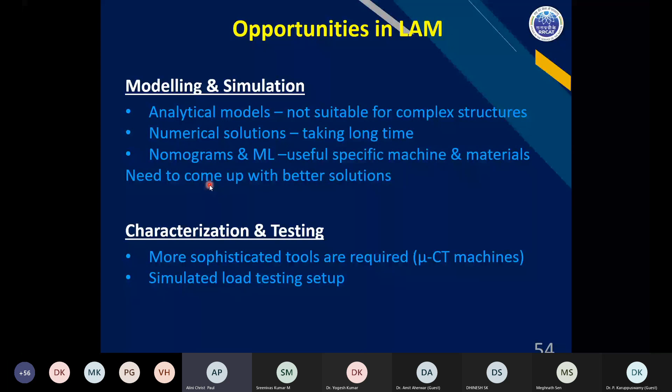When I talk of quality control and assurance, there is a rule to think of: what should be the design code, how ASME sections and others can be used. Today, when we talk of strength of material, if we're making a pressure vessel or vacuum vessel, we simply say we can use ASME Section 8. Similarly, for reactors, we talk of Section 3, and for welding, we have Section 9.

What I'm saying is there is a need to have standards like this, where people can think of and blindly follow and take advantage. So there is a need to develop and contribute to this, and this is the opportunity. There is also a need for certifying agencies and guidelines, so that material built by the conventional process or by laser additive manufacturing process is certified to be comparable or good for a conventional or particular application. So there is a need to work on these areas.

We need to work on entry into new domains, capability demonstration, and dissimilar material joining. These are areas where application development people have to work on.

When we talk of all these nine domains, definitely there is scope to work on the development of curriculum. There is a need for faculty development. A lot of faculty development programs are being taught in the country today, and these things are changing the scenario a lot.

The summary slide is like this. You all know that laser additive manufacturing is a novel method capable of providing new manufacturing. There is a decent lead at the international level. India is gearing for the adaptation. RRCAT has taken a leading role, from machine development to process modeling.

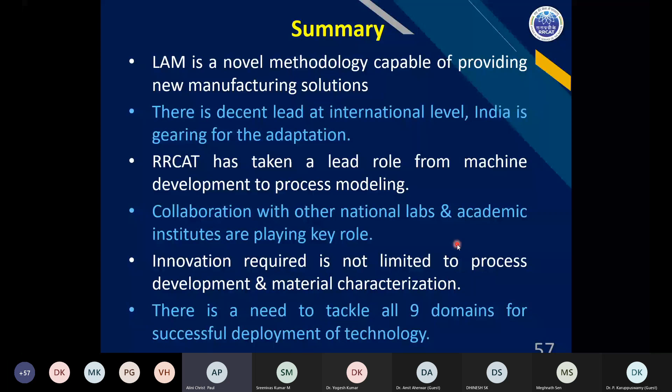With this, I stop. Thank you very much for the patient hearing.